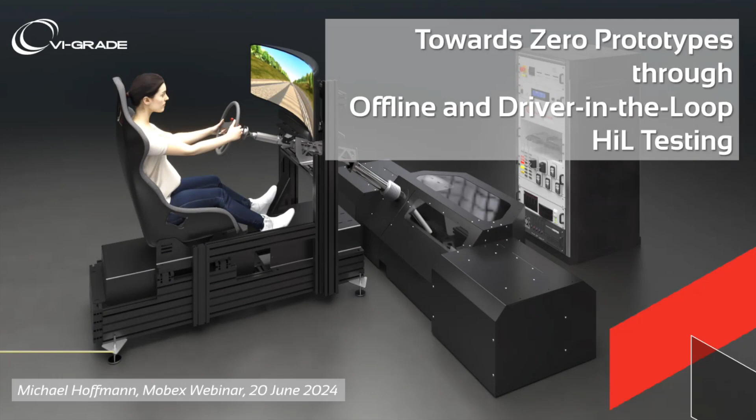What we want to talk about, let me describe it by a quote I saw from the CEO of BMW a little more than a year ago, where he was saying: look, the ones who will be winning the race in automotive won't be the ones with the largest screen in the vehicle or who will write the longest program code. The ones who will be winning are the ones who will offer the best emotional experience for drivers. And that's our focus at VI-Grade.

We want to help our customers to assess the driving experience throughout the development process and cut development time during this process. When we talk about driving experience, we are grouping it in three different areas. The first one is the classical driving experience, so the relationship between the driver and the vehicle. How does the vehicle react to the driver inputs? These are usually described by the ride, handling, and NVH characteristics.

This area has, from the beginning of cars a long time ago, always been one area defining the driving experience. We now have two additional areas which are gaining importance in recent years. One area is the interaction between the driver and all the electronic assistants, so advanced driving assistance systems or even autonomous driving. How is the experience there? Does the driver feel comfortable in the cooperation with these assistants?

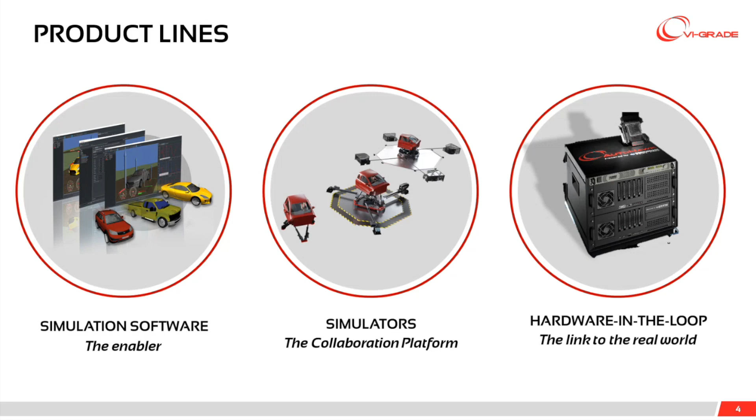Again, that's our focus at VI-Grade. We want to provide you simulators and software which help you to assess the driving experience from early development up to detailed design. In order to do this, we offer three product lines: simulation software, our driving simulators, and our hardware-in-the-loop solutions. Before we dive deeper into our offering, I thought I would share a customer story which hopefully illustrates what we are trying to accomplish and how our customers are using these tools.

The example I picked is from Mercedes-AMG. You see this car here. This is a special car called the Project One. It is a street legal car with a Formula One engine. Its development was undertaken by AMG on the occasion of their 50th anniversary. If you're interested in this car, I have to disappoint you. There was only a limited number of cars produced, and to my knowledge, they have all been sold. But let's have a look at how AMG has been using our technology in the development process of this car.

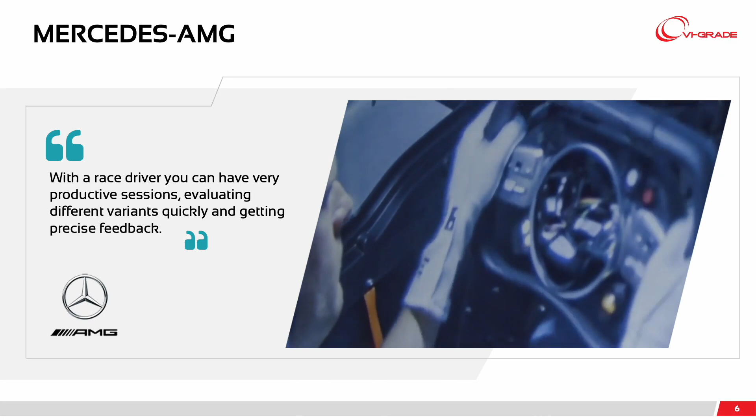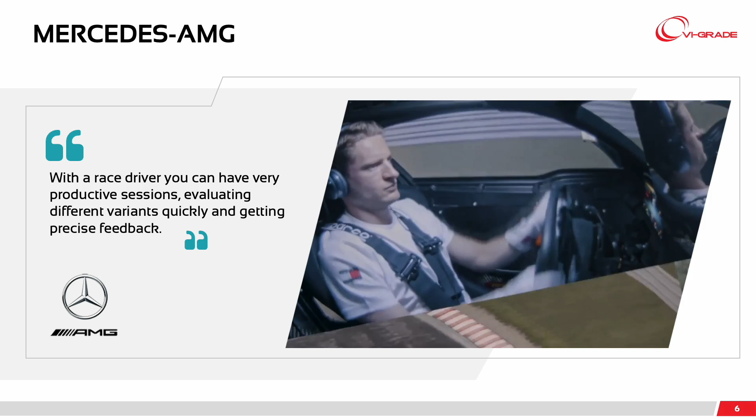During a test, we get the measurement data where we can look at G's and how the car responds to the driver. The specialty about the Project One cell we see here is we have torque force feedback, a torque machine, the full braking system from pedal to brake pads. Today we have Maro Engel coming round. He won the 24 hours race at the Nürburgring in 2016, so he knows his way exactly around the Nürburgring. With a race driver, you get really reproducible driving, so you can constantly go into the same direction and same spots and analyze changes pretty exactly. They're used to driving these kinds of performances, so they give you direct and precise feedback.

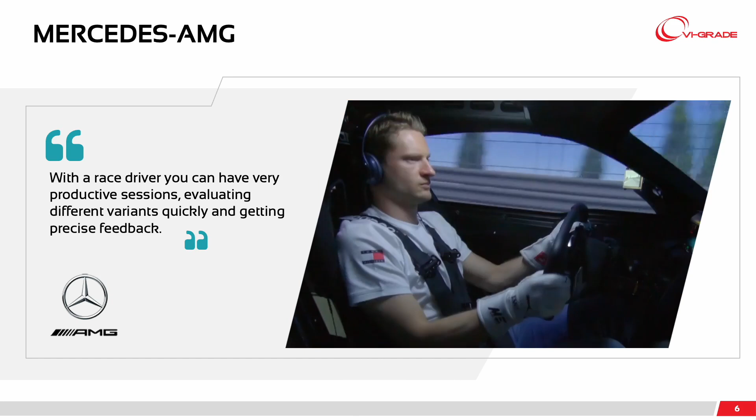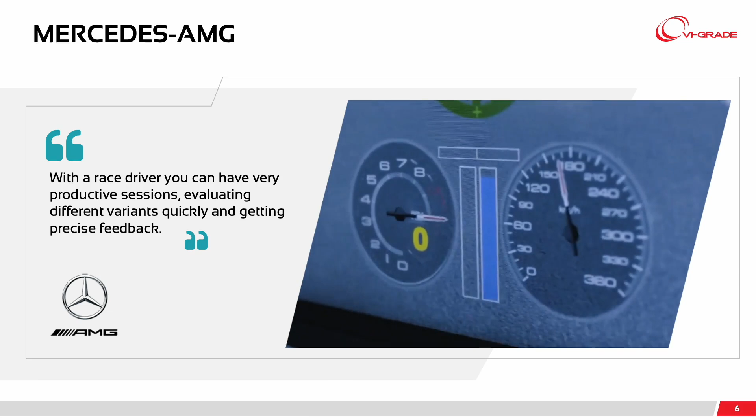Sitting in the car feels amazing. It's such an amazing project, and when you pull away in the simulator, you feel straight away the huge power, very high precision. The car is really all about performance, and you can feel that, and it puts a smile on your face.

I think you heard the last sentence from this race driver. He said it puts a smile on your face. And to me, when I hear that a professional race driver who likes to drive real cars on real roads also gets a smile on his face while experiencing a new design on the simulator...

For those not so familiar with simulator technology, here's how it works: you have a digital twin of a new car design, and you as a driver provide input to this digital twin. The computer model provides back displacements and accelerations of the vehicle, and this is replicated in the simulator. What's also important is that you get the right impression or immersion of the vehicle's behavior. It's not only about vibrations, it's about the sound and the environment, so that all three senses are excited and synchronized to give you the right feeling and immersion.

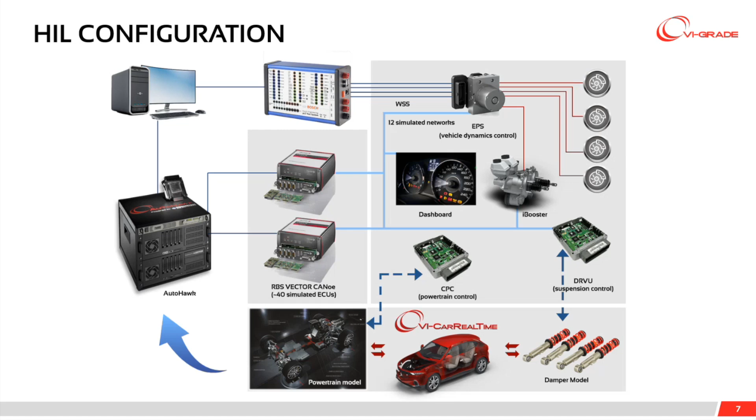Let's now have a closer look at the hardware offering, or the hardware-in-the-loop offering you can expect from VI-Grade and our sister company, Concurrent Real Time.

When we talk about these solutions, we'd like you to remember three things. Our solutions are high performant. Our solutions guarantee hard real time, which is particularly important for mission critical or safety critical applications. And our solutions offer an open environment.

You may say, okay, everybody can claim this - how do you ensure this, or what are the foundations to this? First, the operating system we base our solution on is RedHawk Linux, so that you get hard real time in combination with our real-time software stack, which helps you easily integrate this into our whole environment of driving simulators and so on. In addition, we integrate the latest and greatest commercial off-the-shelf components. And last but not least, we leverage the more than 50 years of expertise which our colleagues from Concurrent have accumulated over the years.

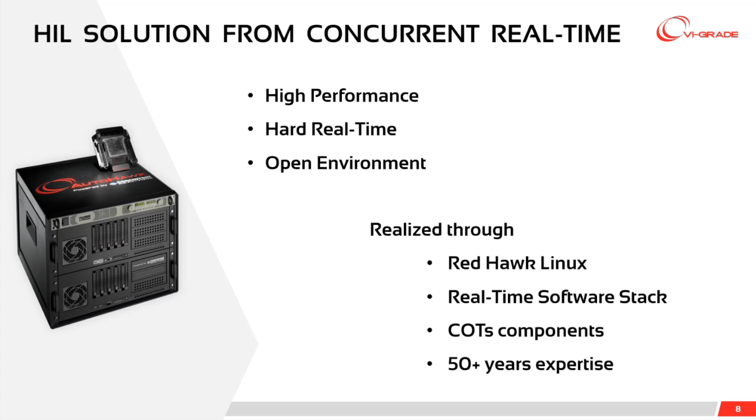Core to this is the black system you see here. You can have a different configuration, which we call AutoHawk, and we offer this in various configurations. You can start with 8 core machines and go up to 64 core machines, so you get high performance through multi-core technology and the usage of, for example, different chips from Intel for the 8 core machines up to the 64 core machine. Then in addition, you need memory, disk, and interfaces.

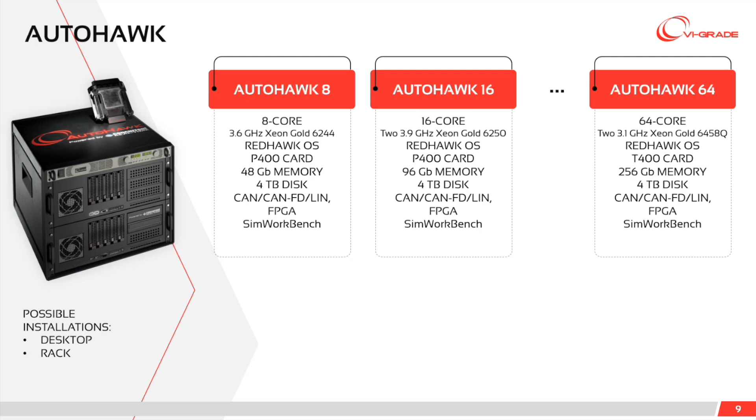You also need, if you want to model high-speed events like sensors or something in electric motors, FPGA boards. And then you have simulation workbench as the glue that brings these things together. This might be better explained in the next slide.

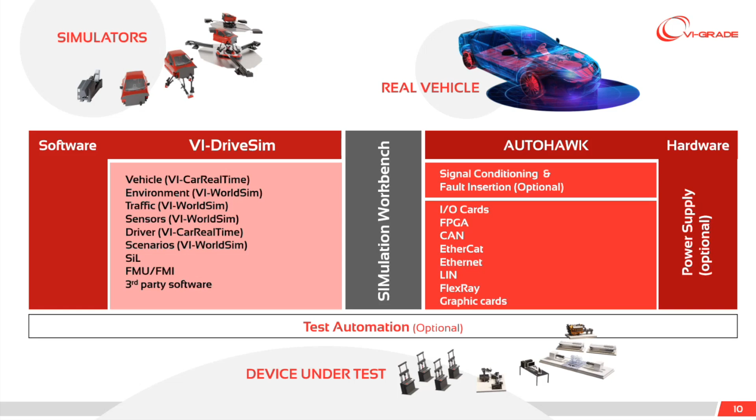Basically, our offering starts with AutoHawk, the hardware, with different I/O cards like I talked about - FPGA, EtherCAT, Ethernet, and so on. On the other side, you have the software stack from VI-Grade, which manages the digital twin of the vehicle, the environment, the traffic, the sensors, drivers, and scenarios, and so on. Like I mentioned, simulation workbench is the glue bringing all these different components together. You have tools for test automation, you connect this with the device under test, and then you test it either as a standalone test rig, with the simulators, or even within a real vehicle.

I was thinking, should I now give you 10, 20 slides where I dive into the details of our different offerings? Or wouldn't it be more interesting for you if I just shared some customer case studies with you?

We just had a conference, about a month ago, called the Zero Prototypes Summit. This was a gathering in Udine in northern Italy. We had 300 people there, 1,000 people connected virtually, and quite a lot of customer presentations.

When we looked at the common themes at our Zero Prototypes Summit around hardware in the loop, I think we could summarize it under the simple word 'more.' Customers wanted to integrate more ECUs, connect more hardware components to a simulator. Others were interested in more detailed multi-body models, and there were people saying we need to do more advanced controls. The case studies I'm going to show you will address these kinds of things.

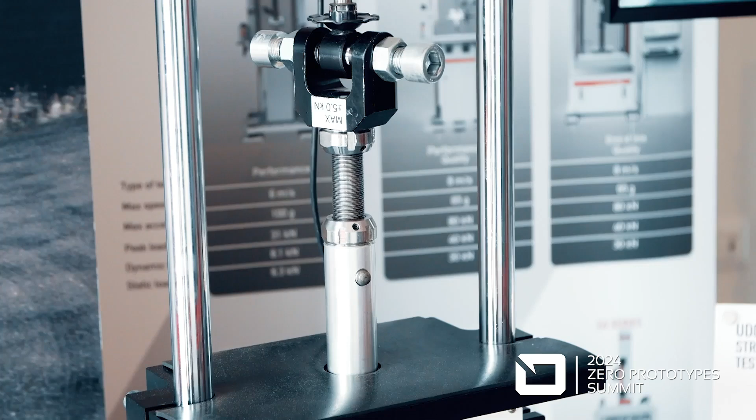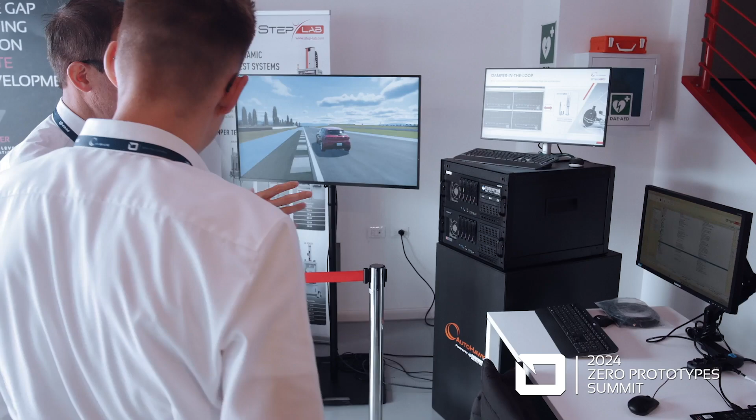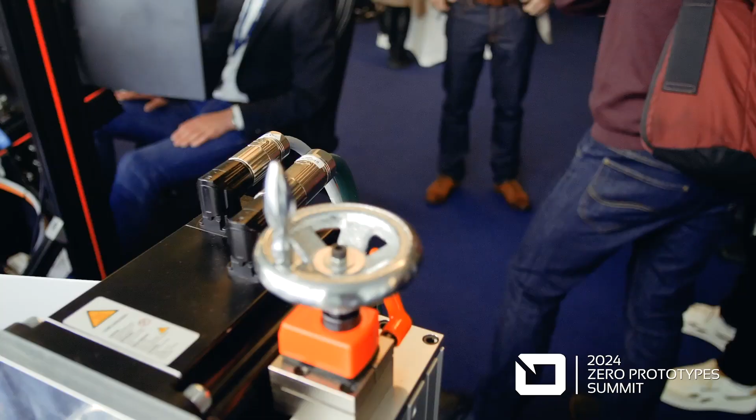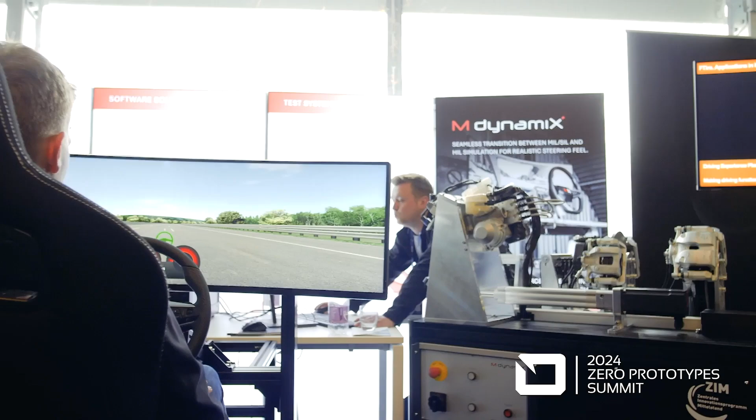We're now moving to the ADAS demonstration. In ADAS, you need models for your camera and radar sensor. Initially you do this with digital versions - for example here, I think it's a lane keeping system, which we test on the simulator. Then in later stages, you want to replace your digital model of camera and radar with a real camera and real radar system, and that's what you see here - a combination from MegaRide with their camera model and Rohde & Schwarz for their radar model.

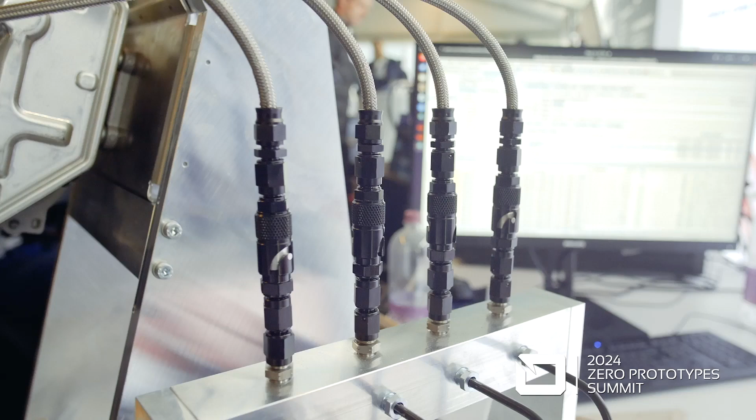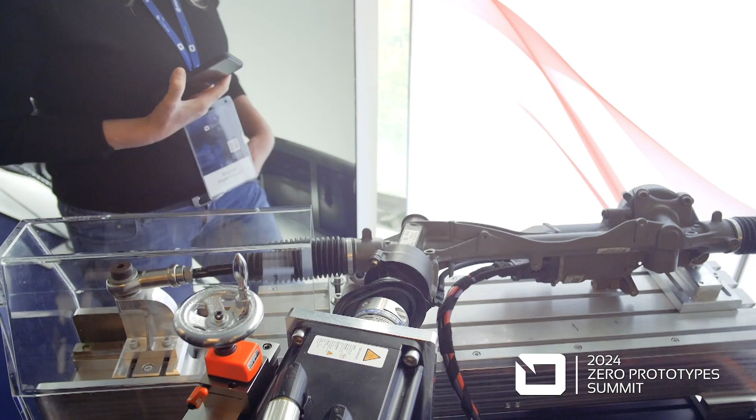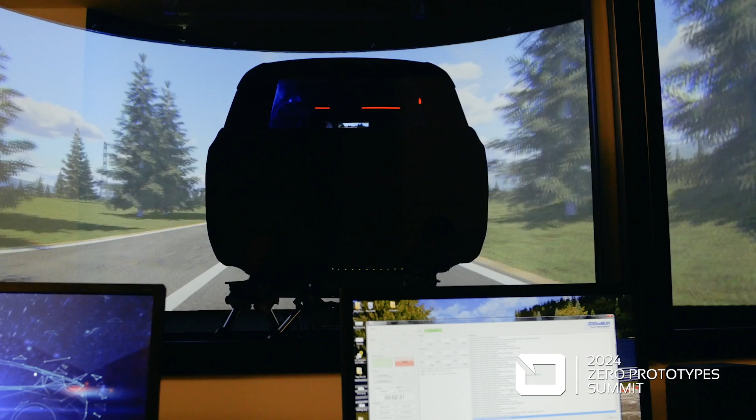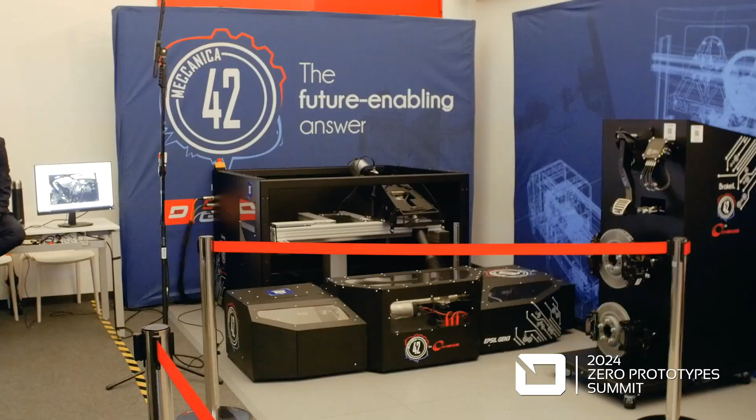Same thing here, now using a different simulator - a driver-in-motion simulator with large displacements, but the concept is the same. We have a digital model of the car and the environment, and initially use a digital model of the steering. In this demonstration, we also bring in the actual steering, which you see here on the right-hand side.

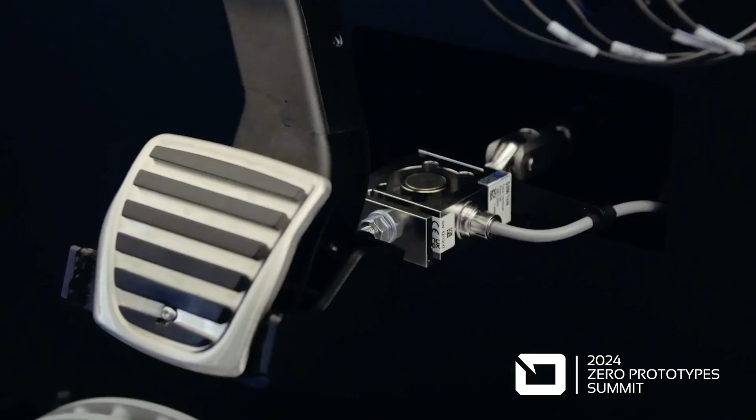So these were just a few examples to give you an impression of the things shown at the conference, where people could experience these simulators live.

What I now want to do is go into the presentations and share some of them with you. Let's start with the first one - I mentioned more ECUs - this was a presentation from Bugatti Rimac, where they talked about how and why they coupled a multiple ECU HiL system with their driver-in-the-loop simulator.

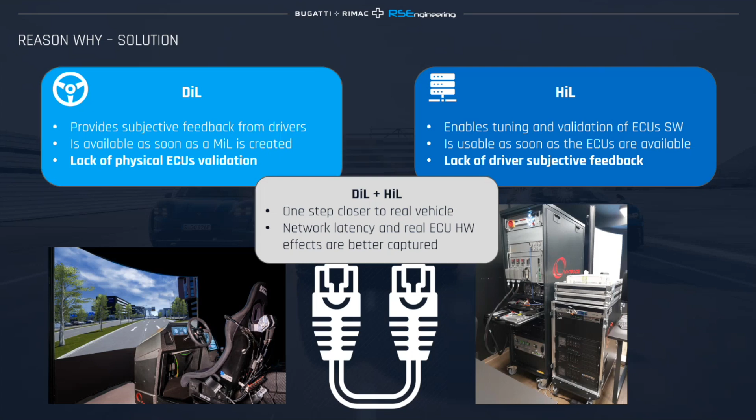So now they can test the system together. They can evaluate, tune, and debug the entire torque system. They could evaluate and tune the drivability performance of the vehicle. And they quickly generate logs to pinpoint issues they detected with software and hardware suppliers.

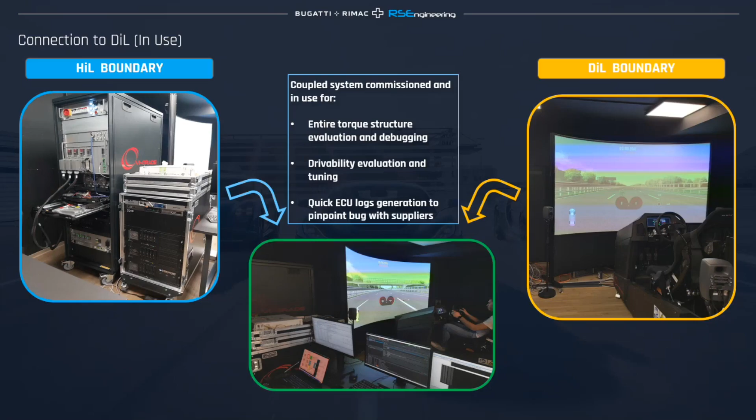I talked already a bit about the connection of actual steering systems with our driver-in-the-loop simulators. This was presented and realized by MDynamix. Not sure how many people know MDynamix, but they're quite well known in the German-speaking market. Originally started by Professor Pfeffer from the University of Munich. They know a lot when it comes to steering, modeling steering systems, and they're also generating hardware-in-the-loop setups for steering systems, so that you can test the ADAS function.

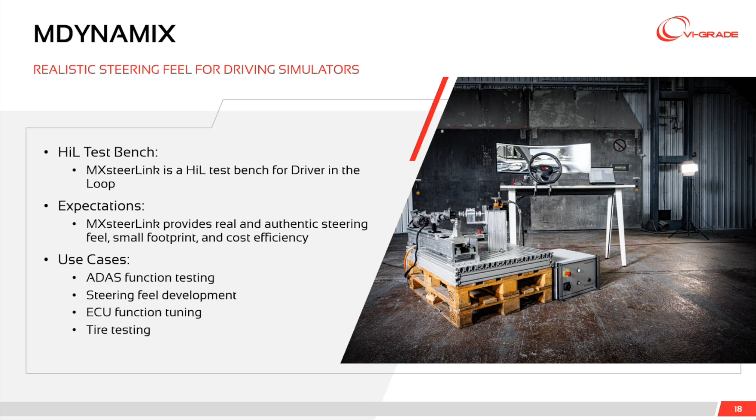You can use it for steering feel development, ECU function tuning, and tire testing. And again, we have been working with them so that you can seamlessly integrate it into our line of simulators.

Talking about steering systems, there was a presentation from Mercedes-Benz where it was simulator-based virtual prototyping of vehicle steering. Starting point here is Mercedes. Mercedes has been using this ride simulator for quite some time. Initially, this simulator was used where you take your seat, and they are playing back measured signals on this simulator to assess the ride and ride behavior of a future vehicle.

What Leonard now is focusing on is expanding this test rig. First, put a steering wheel on there so that you can drive the vehicle. In order to drive it, you need to have a digital twin of your vehicle. He has chosen to use a detailed multi-body vehicle model modeled in SIMPACK. You need to have a digital representation of your proving ground, and then you need powerful hardware, in this case RedHawk, in order to do the real-time computing.

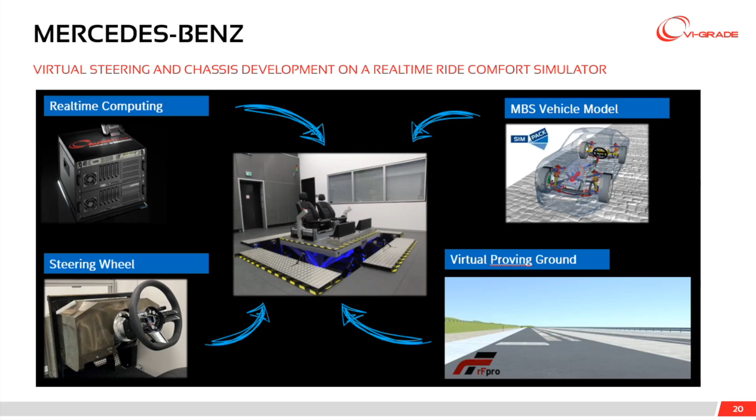So then, for example, when they want to do some parameter studies, modifying some geometry of the twist beam, they wanted to do this on the simulator and not always go back and generate some new input files. This is why they have chosen, in their case, Adams Real Time.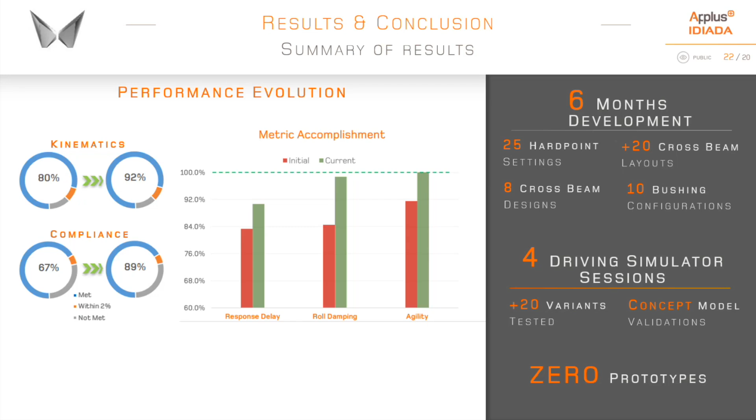They could look at 25 different hard points, more than 20 layouts of the cross beam, 8 cross beam designs, 10 bushing configurations, and they did all of this through 4 driving simulator sessions, where they tested 20 variants and validated the concept design, and did all of this with the virtual model. So I think quite a nice achievement.

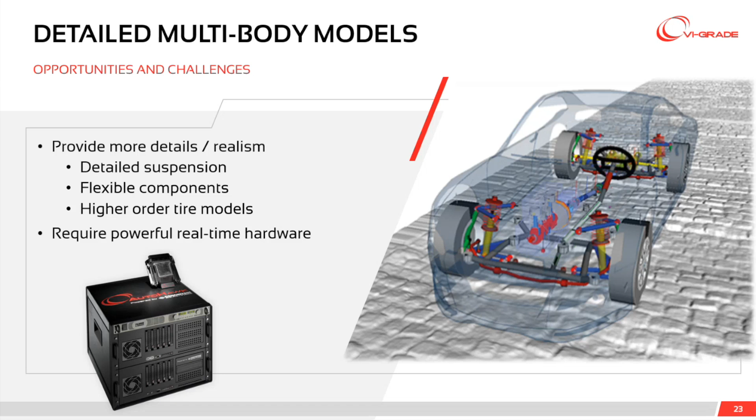So when we talk about multi-body models, the nice thing, if you do a detailed multi-body model, you have your detailed suspension, you can model flexible components, and you can use higher order models. But if we look at the current state, it requires powerful real-time hardware, and often, even with our hardware, sometimes you need to do some simplification of your detailed multi-body model. This was a motivation for our colleagues at Concurrent Real-Time to see what we can do in order to speed up our hardware.

And Anish presented at our conference some really new results where they used an off-the-shelf AutoHawk, which had a base clock of roughly 4 gigahertz, and there he used 8 cores. And the target often, if you do these kinds of simulations, is a 1 millisecond loop time. And the model we had there took too long.

If we now use some new technology where we overclock our CPUs up to 5.2 gigahertz, and by using only 6 cores, we could exceed the target. So now 700 microseconds. So basically, the value to the customer is you don't have to spend time on simplifying your model. Even more complicated models can be run in real time.

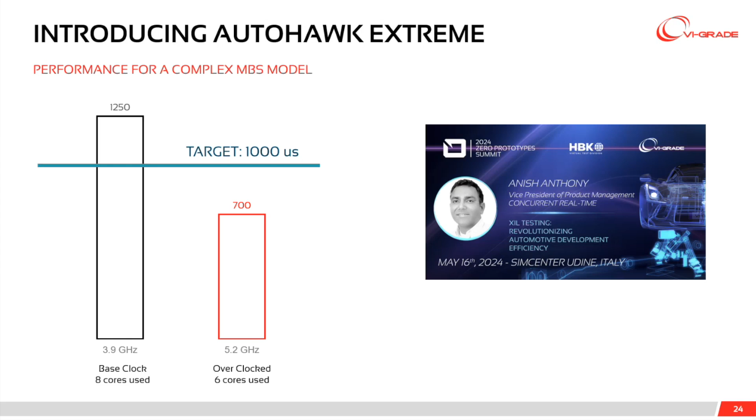But of course, I think we all know this. The faster the hardware gets, you will get innovative and you will model more and more details. So this will be a never-ending story. So at the end, you can say vehicle models will take 1 millisecond, because you will always use the computer hardware performance you have at hand to come up with more details which you could model.

Okay, so we're coming to the case, and I talked about this. So we talked about more ECUs, more hardware components, more detailed multi-body models, and now let's talk about more advanced controls. And this presentation was given by Politecnico di Milano. For the ones who follow autonomous racing, Politecnico di Milano should be familiar to you. This university participates in these autonomous racing competitions, and my understanding is they won multiple times.

Their presentation was focused on leveraging VI-grade solutions for autonomous perception and control optimization. So Alberto presented on 2 things. Topic 1 was how they were using our simulators to generate training data for their perception algorithm. When you do machine learning, you need training data, and they were quite innovative. They used our WorldSim, our solution for digital twins of the environment, in combination with our driving simulators to generate training data for their machine learning algorithms. So this is for the perception piece.

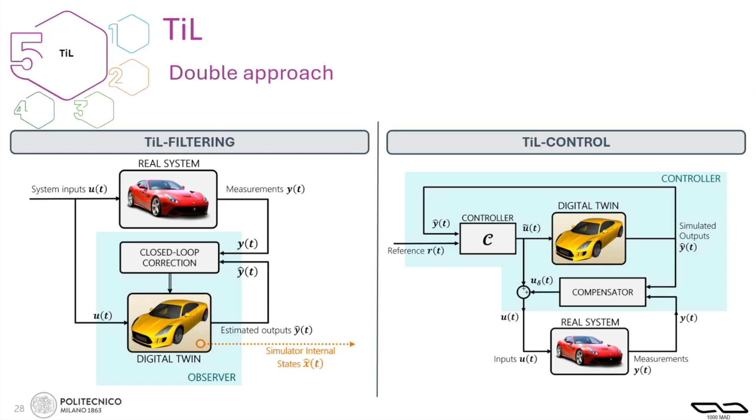And they were looking here at two different approaches, where they're using the twin in the loop as a filter, as an observer. And then they used it also in the control loop. So in both cases, the idea is, instead of using simplified equations, you're using non-linear equations for the controls part of the autonomous vehicle. And these are just some results from them. So basically, they're showing that the twin in the loop, in the control loop, shows a lot better tracking to the desired signal.

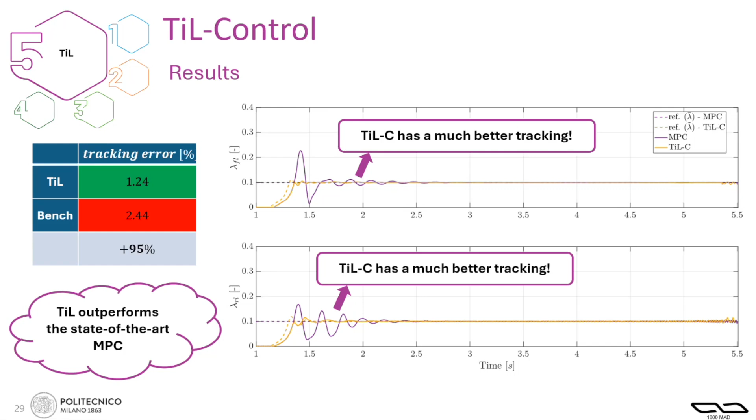So just an example about the possibilities you have with a system like AutoHawk. So when you have a very powerful compute environment, you also can execute non-linear vehicle models in real time.

All of this technology, powerful simulators, powerful hardware-in-the-loop systems are nice, gives you the opportunity, but one important thing, at least from my point of view, is, in order to implement this into your development process, you need to have a process in place where you generate all the digital twins you need during this development, so that they are available when you need them at the accuracy you need them. And if you're interested in this topic, I really would recommend that you dive into the presentation from Mercedes-AMG, where they were talking about their virtual garage.

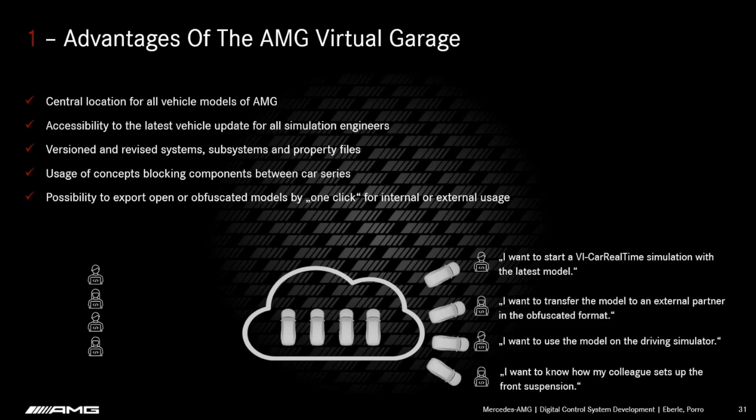So basically, there are simulation experts who make these digital twins of all the vehicles under development available to everybody in the development organization, so that they can dynamically configure the requested model, which has been validated, and then make these models available to the different consumers, whether these are the driver-in-the-loop people sitting on a simulator, the hardware-in-the-loop people who validate ECUs, people who do software-in-the-loop or model-in-the-loop simulations, particularly the software-in-the-loop people, where you do constant integration, constant testing in the cloud.

And the nice part here is the models which are used on a driving simulator have very high accuracy and are validated, because these professional drivers will very quickly realize that something isn't right in the model. So I think this is what the colleagues here at Mercedes-AMG appreciate. When they use hardware-in-the-loop, software-in-the-loop, or model-in-the-loop, they know the digital twin representation of the vehicle model is validated and they can rely on it.

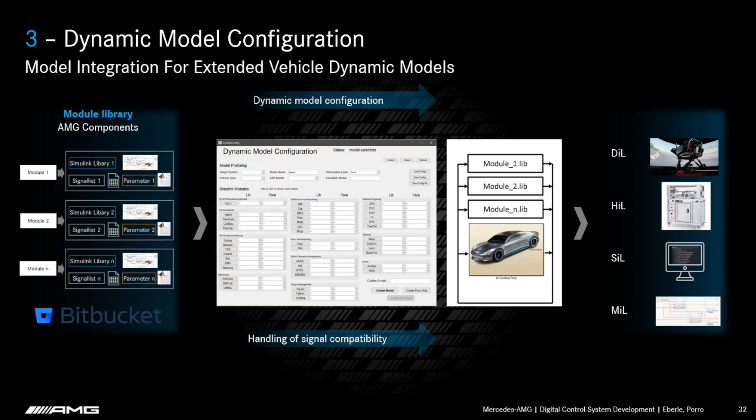That's what I wanted to share with you. So hopefully you got one or two insights into what you can achieve when you combine digital twins with simulators, with hardware-in-the-loop. And just to summarize, you can get to higher innovation, like the AMG car we talked about. This car broke a new record on the Nürburgring. You can get to shorter development time, like Volvo. They were 2 times faster. Or you can achieve fewer prototypes, like NIO reported, where they had a 40% prototype reduction.